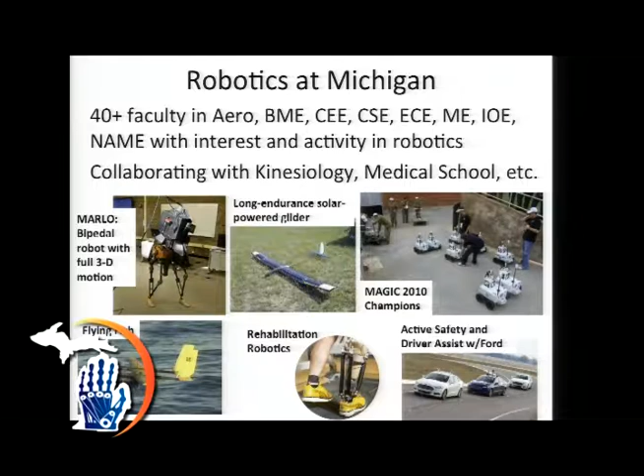James Forbes is in aerospace engineering, and he works on control systems and space robotics. Matthew Johnson-Roberson works on 3D mapping and vision, and also underwater autonomous vehicles. Dimitra Panagou came from Athens into Aero, and she works on multi-agent systems and motion planning.

Ram Vasudevan was hired in mechanical engineering and has a lab focused on human-robotic interaction. And finally, Jia Deng came from Princeton into computer science, and his lab is focused on artificial intelligence and computer vision.

So here we have a big tent approach to robotics. We sort of define it as anything that has an embodied computational element, so it can be autonomous or semi-autonomous, humanoid or vehicle. And we're bringing this together into a new vision of a robotics institute.

So this will probably be divided into different focus areas, such as autonomous vehicles, biomedical and rehabilitation robotics, and some of these other categories here, though these are just examples. I'll talk about some of the different labs that work in all of these different areas in a few slides.

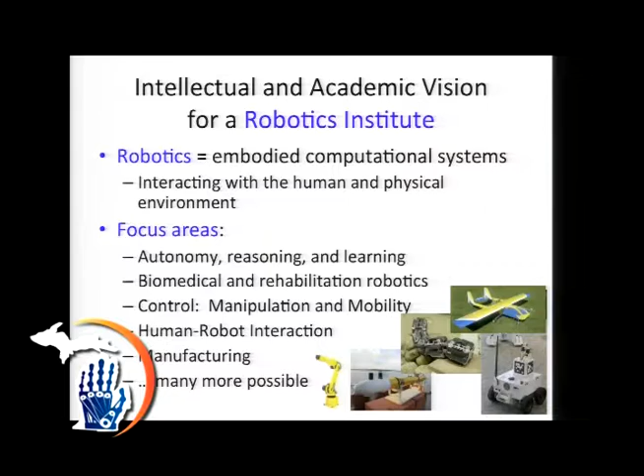We're also very excited about our new robotics PhD program. It's now actually possible to come to the University of Michigan and get a PhD in robotics. The educational program is divided into core areas focusing on sensing, reasoning, and acting.

We've developed 2 new graduate courses, so a robotics boot camp for students coming in, focusing on the math and some of the hands-on aspects of robotics. We have our first class that started last year, and it includes 5 PhD students and 3 MS students.

Actually this year we had almost 300 applicants for the fall 2015 class. The long-term goal for this program is eventually to build up to 15 PhD students per year and 25 master's students annually.

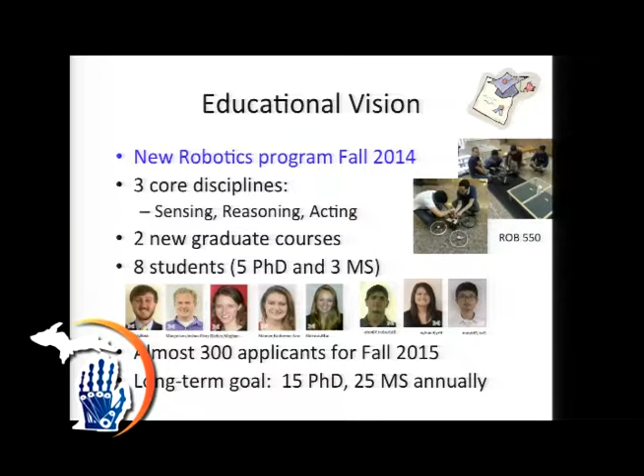We're also very excited about the new building that's being planned for robotics. I talked about there's a lot of faculty all over the College of Engineering, and this is an opportunity to bring them together into the same common space. There will be new space for instructional labs and new space for research all in the same building.

So there'll be new labs for walking robots, flying robots, autonomous cars. And also, you'll hear more about this in a minute, but construction is also finishing up on an enormous new test track for autonomous vehicles.

It's just a few blocks over there. Construction is nearly completed on that, and the planned launch date is in summer 2015.

So we're planning a lot of cool things for the future within the Robotics Institute. We've been co-organizing Robotics Day for several years now, and it's undergone huge growth from originally 150 attendees, to 525 last year, and we'll announce a count at the end of the day, but close to 700 participants this year.

Other things in the works for the Robotics Institute, we're going to introduce new student group programs, and also a seminar series where we can regularly bring in outside speakers and also have internal professors give talks.

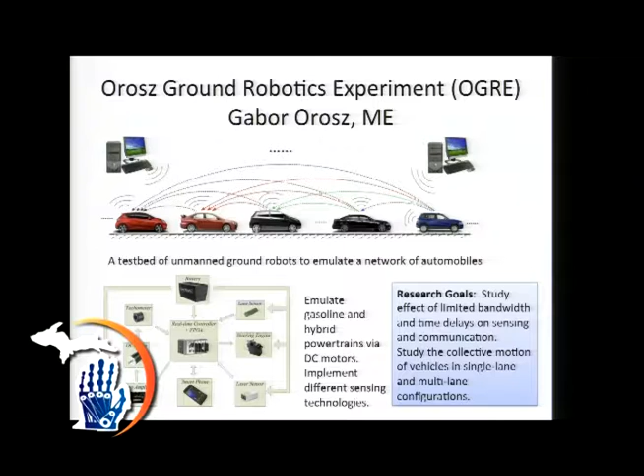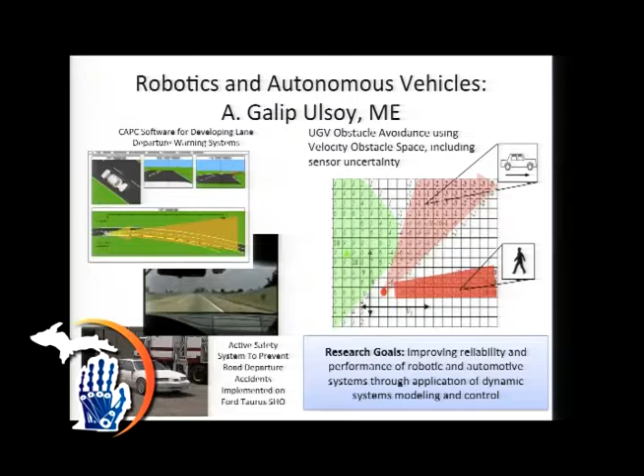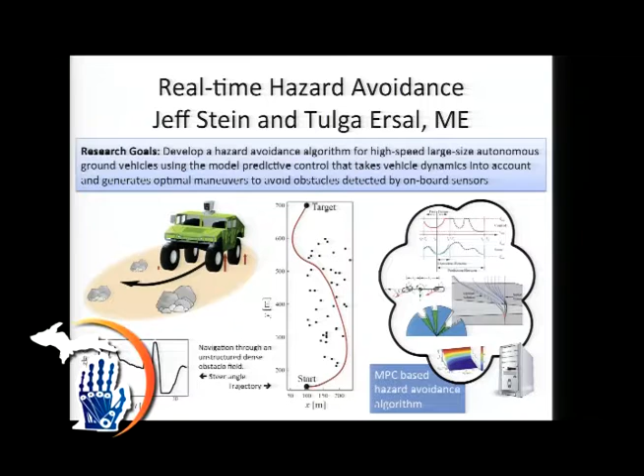The Ulsoy Lab also is seeking to improve performance and safety through better systems modeling and control for autonomous vehicles. And as we heard earlier, self-driving cars have the potential to be even safer than human-driven cars with things like autonomous obstacle avoidance. Jeff Stein and Tulga Ersal also work on hazard avoidance algorithms and find good ways to enable vehicles to then maneuver around those obstacles when they encounter them.

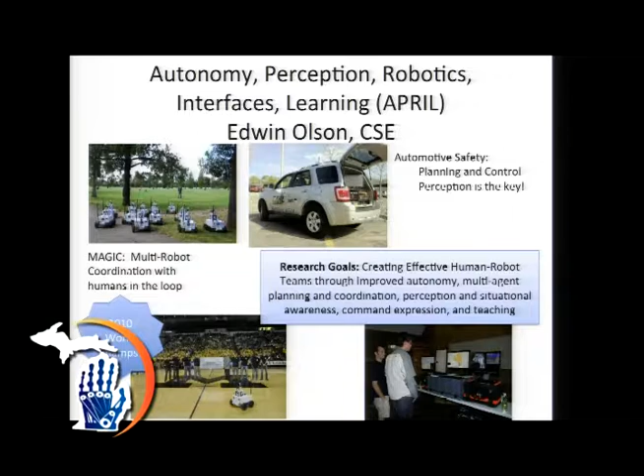Some of Ed Olson's autonomous vehicles will be around here today, and the focus of his lab is creating effective human-robot collaboration. So imagining that you were one person coordinating a fleet of robots. This is an exercise in cooperation, again, where the whole is greater than the sum of the parts.

The Perceptual Robotics Lab works on autonomous underwater vehicles for both basic science applications and also defense applications, and also works in the area of self-driving cars.

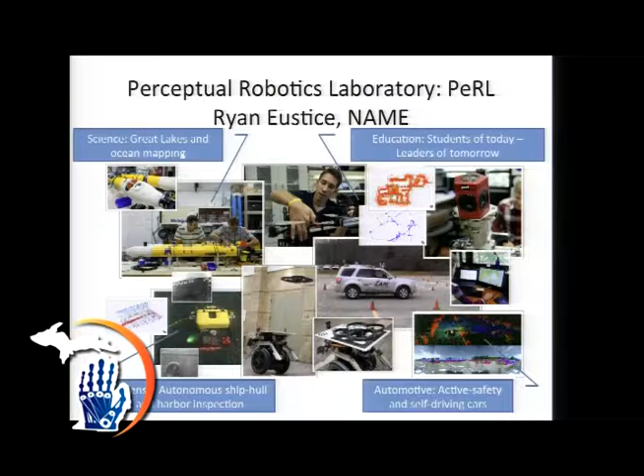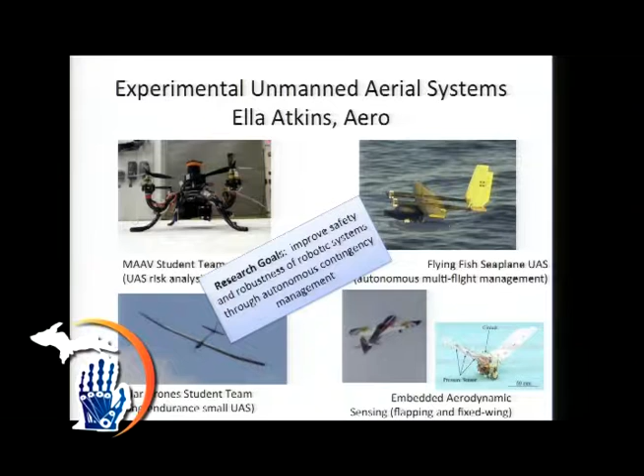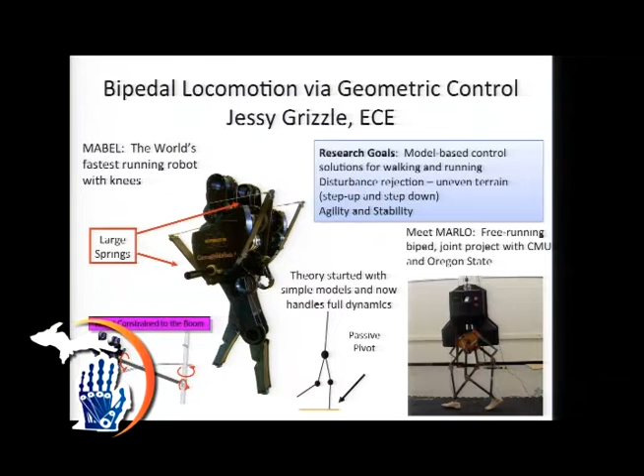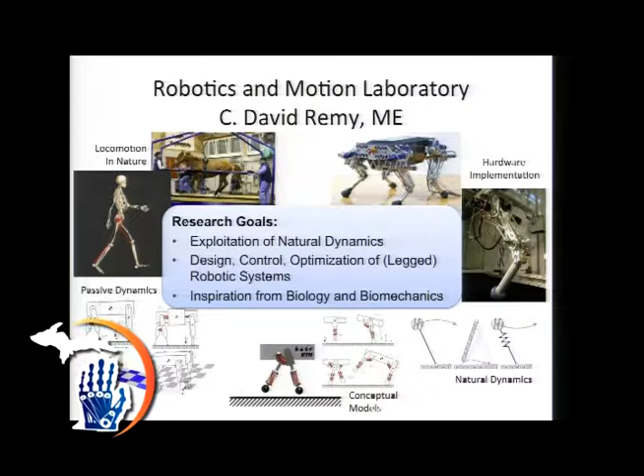Not listed here, there are also two other labs in mechanical engineering that focus primarily on rehabilitation robotics. Art Kuo's lab also does lower limb exoskeletons and studies walking. And Brent Gillespie, also in mechanical engineering, focuses on upper limb exoskeletons and prosthetics. That lab focuses heavily on sensory feedback and how it can be used to improve the use of prosthetic limbs.

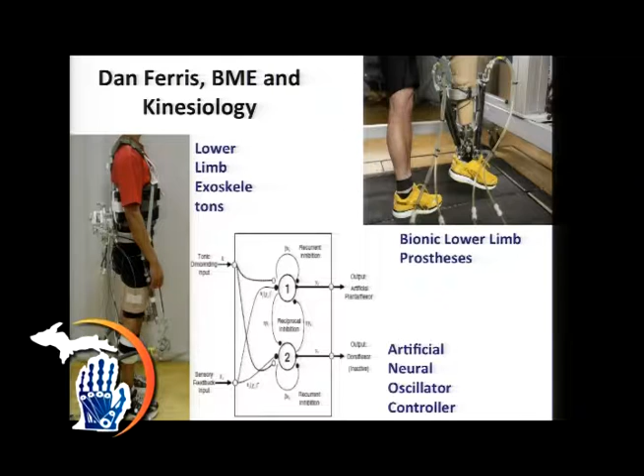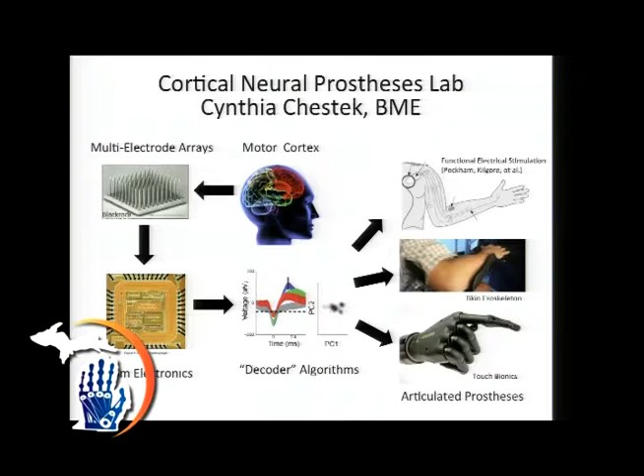This involves a lot of software because we need better machine learning algorithms to interpret the neural code. And it's also a hardware problem because we need better sensors, and we need very, very small implantable electronic devices to interpret the activity of the brain.

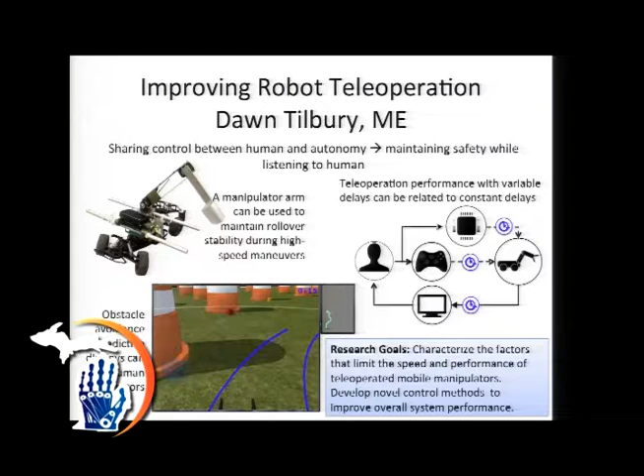Dawn Tilbury, who just spoke, in mechanical engineering, studies robotic teleoperation. That includes incorporating semi-autonomous behaviors, where you have a human and a robot sort of working in tandem with some intelligence coming from both to improve the overall performance.

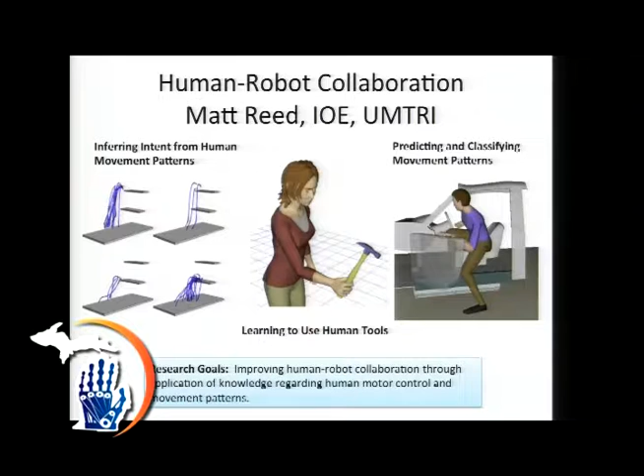Research in the Human Motion Simulation Lab, which is in Industrial and Operations Engineering, is focused on algorithms for accurate and fast prediction of human motion. They want to simulate how humans interact with engineered systems. People are interacting more and more with robotic and automated equipment, and this has to be safe. So imagine a robot that has knowledge of normal human motion, and can detect and respond to any unusual events or error states.

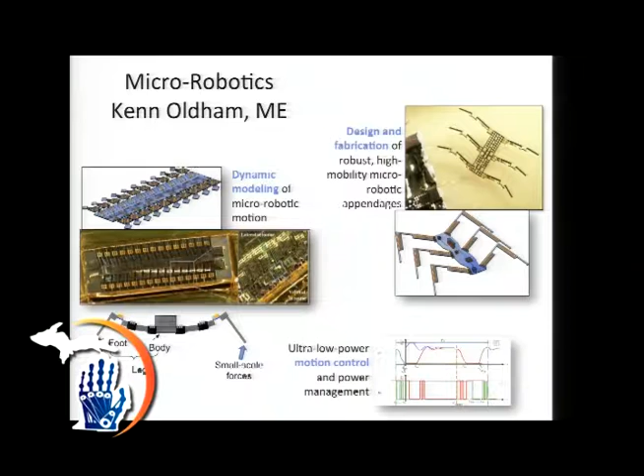Kenn Oldham in mechanical engineering studies micromechatronic systems, or microrobotics. They model, build, and test these little guys here, most of which use piezoelectric actuation in order to move.

Emily Mower Provost is adding an emotional dimension to robotics. If you've ever called into an automated voice system for something and found the voice to be very unsympathetic, that's a problem she's trying to solve. Her lab works to mathematically characterize emotions in conversation and ultimately use this to improve the interaction between humans and robots.

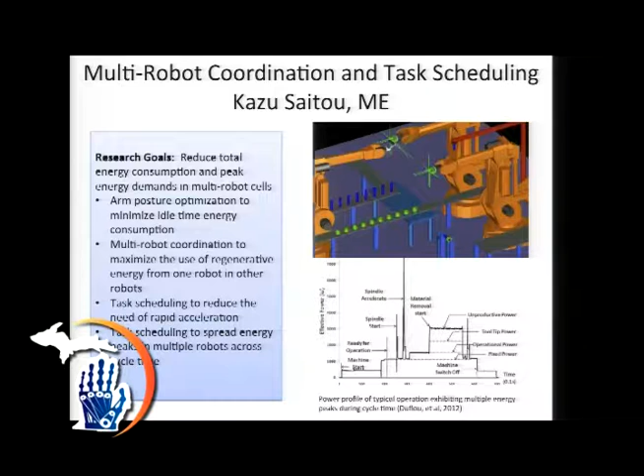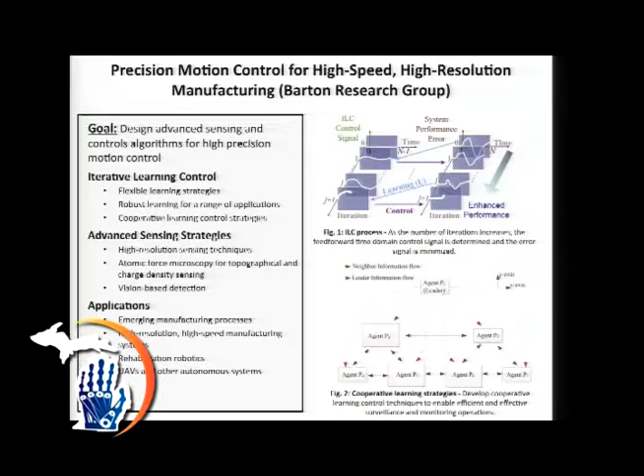Kira Barton's lab also focuses on manufacturing robotics, particularly in tasks that require high speed and high precision. For example, incorporating new kinds of sensors and learning strategies in order to improve the manufacturing process.

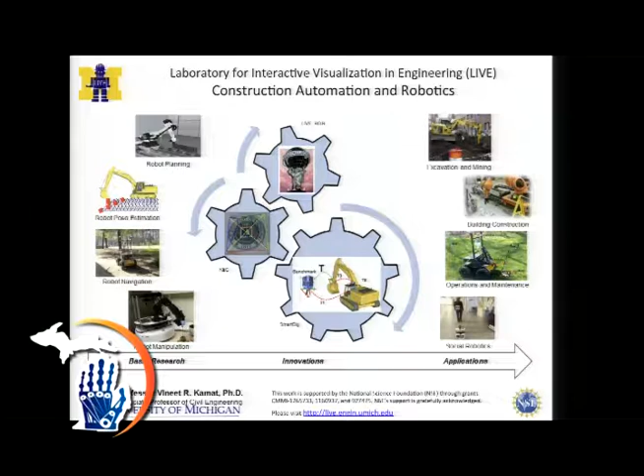Vineet Kamat is in civil engineering and focuses on automating construction tasks, in things that involve civil architecture or civil infrastructure. For example, the Smart Dig project uses computer vision to localize buried utilities so that you can excavate in a more safe manner.

The goal of the Interactive Task Learning Lab is very much focused on artificial intelligence. Their goal is to create autonomous agents that can be taught new things in a very intuitive manner. Imagine a robot that you could teach by talking to it and demonstrating things the same way you would do with another person.

And finally, let me talk about two faculty who are new this year at the University of Michigan. Jason Corso in electrical engineering has a lab focused on computer vision, and particularly on visual understanding.

So you might be able to record an image on a camera, but then in order to understand it, you have to work on automated segmentation, recognition of particular activities, and even taking that video and turning it into a text description of what's going on.

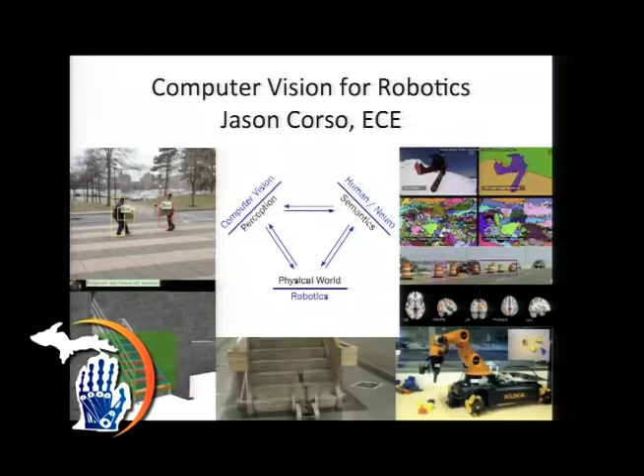Ram Vasudevan was recently hired in mechanical engineering, and his lab is focused on human-robot interaction. For example, robotic prediction of human behavior, and then trying to apply those predictions to making things safer. This also has medical applications, for example, you could imagine using this for automated diagnosis or rehabilitation.

So that's my last slide. You can see we have a wide variety of labs here from a wide variety of different departments, but they're all very engaged in the robotics program here.

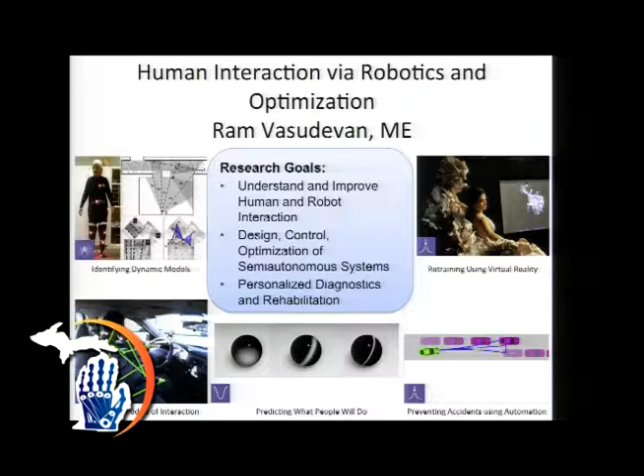And this is all coming together in the plans for the new Robotics Institute. We're very excited about our new robotics PhD program and also the construction of a new robotics building that's in the works for North Campus. We're looking forward to bringing together many of these groups under the same roof. Definitely stay tuned for more big announcements over the next year.